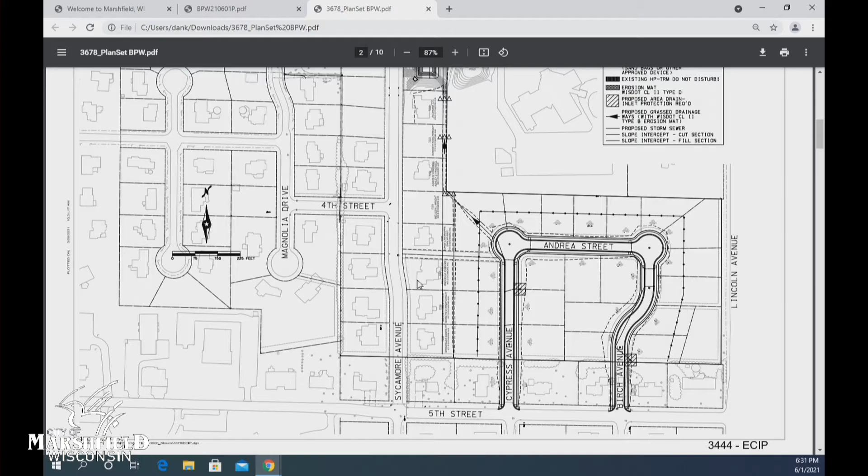The first page being page 3678 ECIP, which is our erosion control plan. This is required for all construction projects and shows where the locations of silt fence, ditch checks, and inlet protection are. The next page, I'll go to, yeah, right there.

This is the sanitary sewer and storm. You can see this comes through an easement from Sycamore Avenue. This sanitary and storm crossing was installed with the Sycamore Avenue project in anticipation of this project coming up.

One thing to note, we do show sidewalk on this project, but the only locations where sidewalk will be installed are at the start of the project, where we have existing driveways entering into the right-of-way.

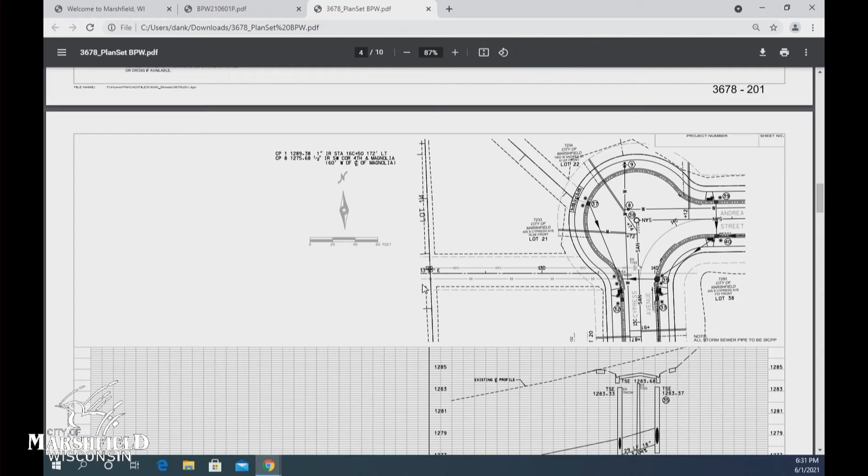A special note too, if we go to the next page, the right-of-ways of Cypress and Birch were created when the original properties along Fifth Street were platted. Homeowners with existing driveways on Birch and Cypress will be assessed for the individual entrance work associated with their specific property.

On page 507, which is the start, we'll be starting on Fifth and Cypress, tying water main into Fifth Street, and the sewer will begin just south of the first lots at station 10 plus 50. Storm sewer will start at station 11 plus 15.

Page 508 approaches our low point for the underground infrastructure, which is at station 1340, just before the cul-de-sac, at Catch Basin 37. This is the location of the 100-year stormwater overflow.

Our storm sewer on this project is designed to a 1-in-10-year event. In the event we see rain events greater than the 10-year event, we need safe routing for the stormwater that comes off of these streets and properties. Therefore, there is an easement that continues from that location to the northwest, and then continues up to the detention pond. So, go to the next page.

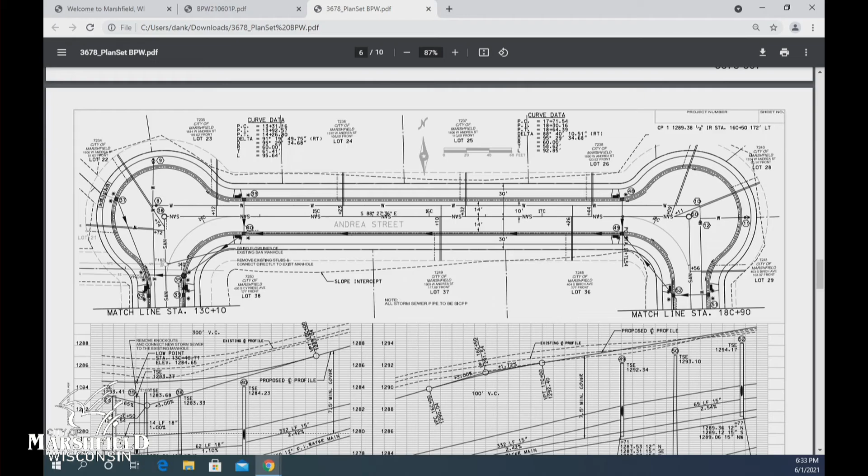On page 509, as we turn to the east and progress south again along Birch Avenue, we climb the hill up towards Fifth Street. Again, the sanitary sewer will end about midpoint at station 2174, which is just short of the two developed lots.

The storm sewer will end at station 2217 with an area drain. Water main will continue to Fifth Street, creating a looped water main system. All the water main and sanitary sewer submittals have been sent to the DNR, so they now have those and they're being reviewed.

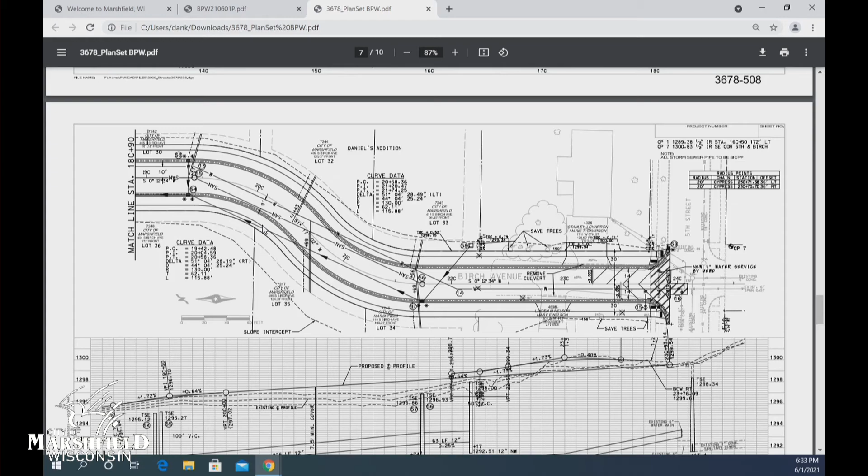In the next page, we have the existing dry or semi-dry pond, which was constructed to meet stormwater quantity standards for the entire developed site. At the time it was constructed back in 2004, this was before we had an MS4 permit with the DNR. Now the pond will have to be converted to a wet basin to meet current stormwater quality standards.

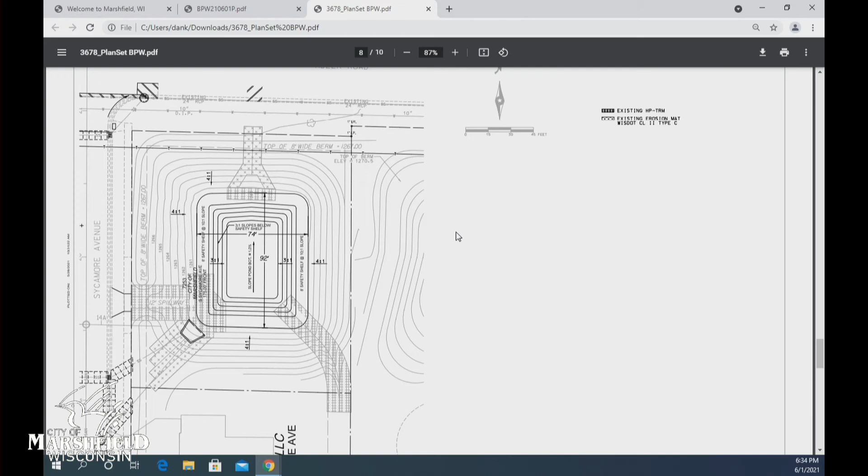The next page basically shows proposed grades for sidewalk for the project, for when and if sidewalk is warranted for this development.

The final page is the drainage ditch for the 100-year storm, basically the routing from that cul-de-sac to the northwest and then north to the pond itself.

From this point, I'd like to make a recommendation that the design plans as submitted for the city subdivision be approved for construction.

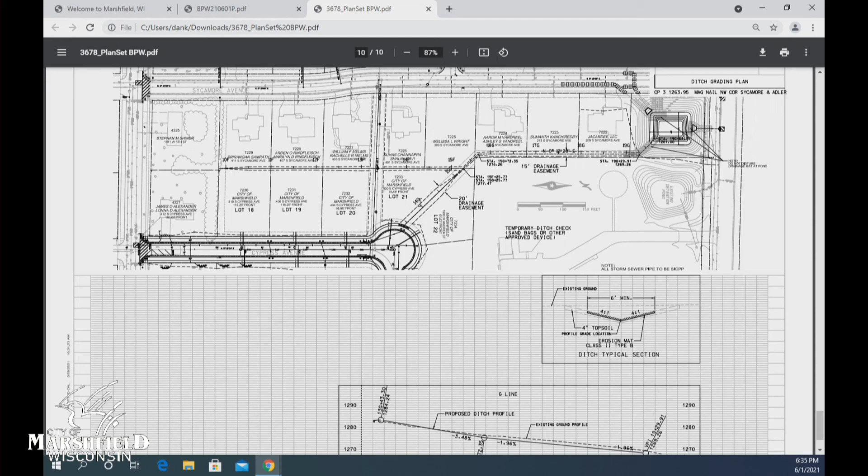Dan, Tom, can you just refresh our memory when the bids were due on this? June 26th or 28th. Okay, so the first ad was in the Marshfield News Herald last Saturday. So at our first meeting in July, we'd expect to have the bids back for this. Yes. Questions?